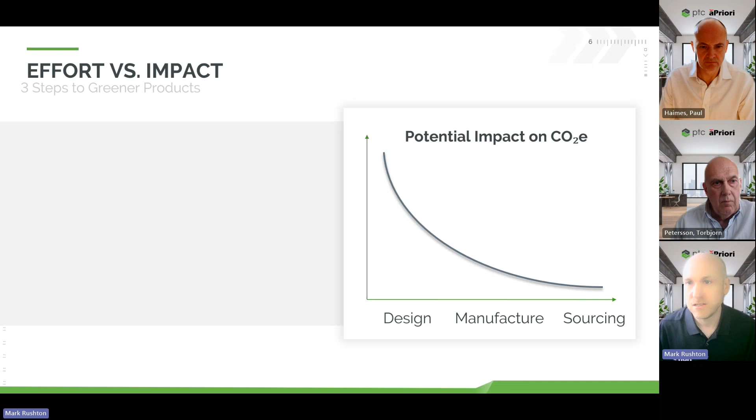So looking at the different levels of maturity, there's a level of effort required and an associated impact, and there's three levels beyond the baselining. So as I mentioned, changing the location can reduce the carbon emissions, but you're not having to make any design changes and no material changes. Then changing the manufacturing process, you might be able to get away with that depending on the design, depending on how much has been invested in tooling, things like that. You might be able to change the material or make some minimal design changes. And then starting from design means you do have a holistic approach where you can change everything.

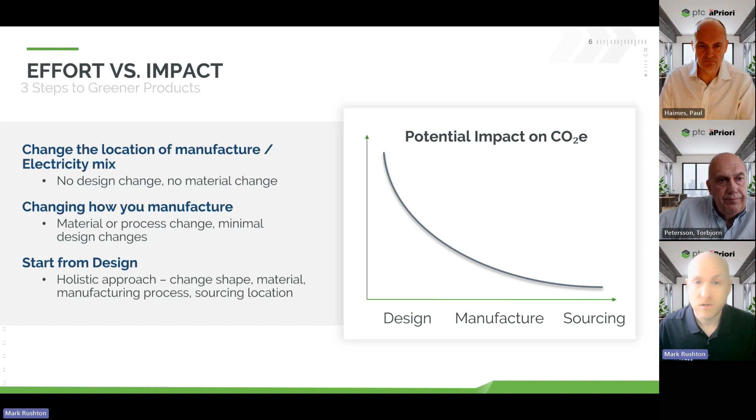And you can see on the chart there, the earlier that you start, the more potential you have to reduce the carbon emissions. And it's very analogous to cost. So you've probably seen this before. And aPriori knows cost very well. We've been doing it a very long time. And CO2 is very analogous to this.

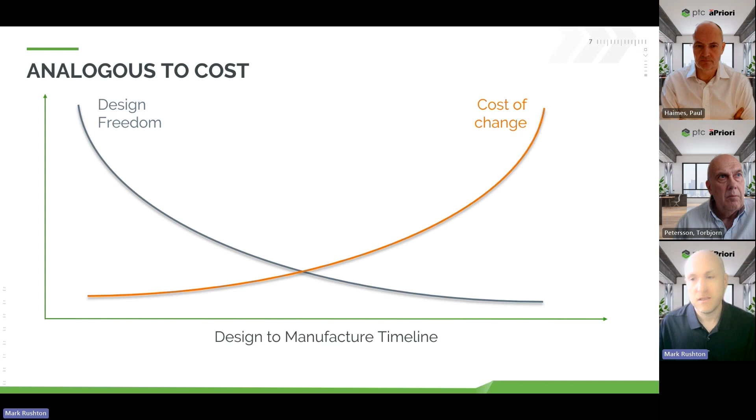So at the start of a project, you've got lots of design freedom. Nothing's really set in stone. So you can make design changes in Creo really, really quickly, and there's no real cost to it. It's just the time. And as you get closer to product launch, more things are locked in. They're set in stone. We don't want to change them, and there's a knock-on effect. So the cost of any design changes goes up the later it is, and that is exactly the same for CO2 reduction potential as well.

So when we start with design for sustainability, there's a number of different ways you can assess it. So a life cycle assessment, an LCA tool, you're probably using them, or at least someone in your company is probably using them today. They really assess everything from cradle to grave. So extraction of the raw materials, the logistics to the manufacturing facility, and any refinement that goes on in between. Then transportation to where it's used, to the customers, to where it's purchased from, things like that.

And then how is it disposed of? What happens at the end of life? Is it recycled? Is it reused? Do we take some and remanufacture it? Or does it go to landfill, or is it incinerated? And if you look at a circular design strategy, that's not really looking at reducing carbon emissions. That's more looking at capturing the resources that are used, reusing the material. And so you can lead to this cradle to cradle and have a perfect cycle.

But in reality, it's never really perfect, because there's always some leakage in that circularity, since you're relying on the users, the consumers, to return the products so you can fully utilize them. So there's always some leakage. Really, cradle to gate is where design and manufacturers can have the most influence, because they're not reliant on the user doing anything in particular. So that's a really good place to focus, and that's where we help as well. But it's really not very straightforward.

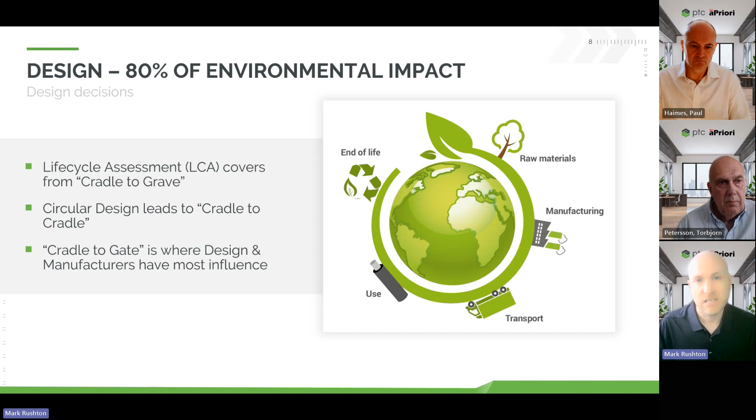It's not intuitive. The next question is really, which of these processes do you think would lead to lower product carbon emissions from the manufacturing phase? We're not looking at the weight or energy use while it's out being used by the consumer, but if we look at raw material extraction through to manufacturing, cradle to gate, what would you say leads to the lowest product carbon emissions? One of the poll questions refers to this slide, so take a look at that question.

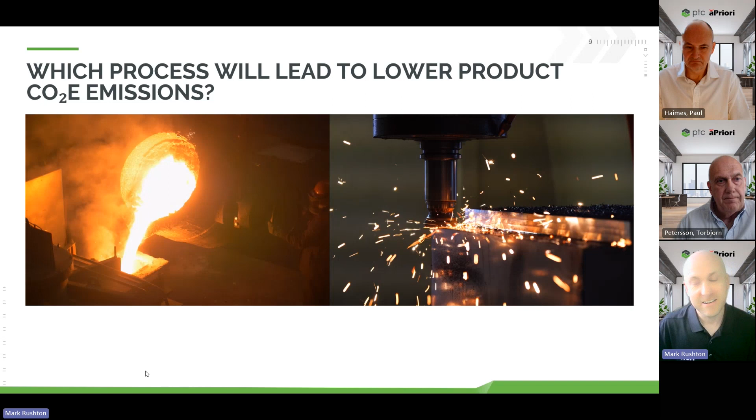I think we had 67% answering casting. Oh, okay, excellent. So I said it wasn't that intuitive, but obviously you do know the answer, because in actuality it does lead to lower embodied carbon for the same design if we were looking at both. That's really because we're looking at the amount of material emissions. The raw material extraction and the refinement of those materials is what makes the difference, and also the wastage, because we're having to buy a certain amount of material to manufacture the product. We really need to consider that amount of material, and machining has got a lot more waste in the process.

Now usually the next question that comes up is, well, what if we reuse those chips or recycle them? Well, we can't actually benefit from that recycling in this product, so we have to consider them as waste. But if we were to use recycled content, that's now got lower carbon equivalent emissions, because it's already been used effectively. We've already accounted for the carbon emissions as waste, so the recycled content is a lot lower.

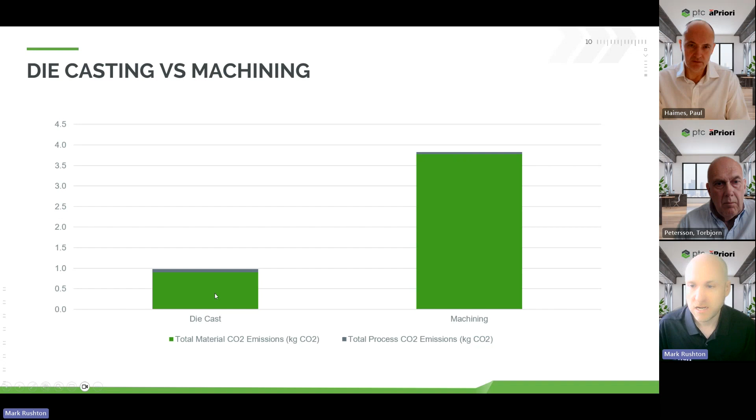Just to break this down a bit further, these are results we found from aPriori. You can see the process emissions are actually slightly higher with die casting, because it's a lot more energy intensive melting the material. There's much lower process emissions from machining, but it's the machining material emissions that really make the difference. And aPriori gives you a percentage of material utilization as well.

So you can see the finished mass, which is usually what gets used in the life cycle assessment, because that's all that's available - that's just taking the CAD model and getting the mass from it. But that's not the true amount of material you need to manufacture it. With aPriori's calculation, we can actually determine the rough mass from the CAD model, and then you get to a more accurate material utilization value and embodied carbon. So that's for casting and machining.

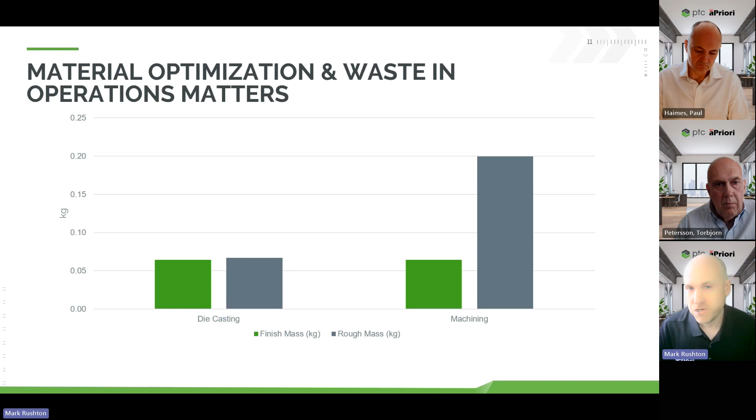But what about a plastic part, a polymer part, for example? Same kind of thing - if you take the same design and look at different materials, this is another approach you might want to use. aPriori comes preloaded with ecoinvent data, so if you haven't got primary data from suppliers about how much carbon is in your materials, ecoinvent is a really good source to augment that.

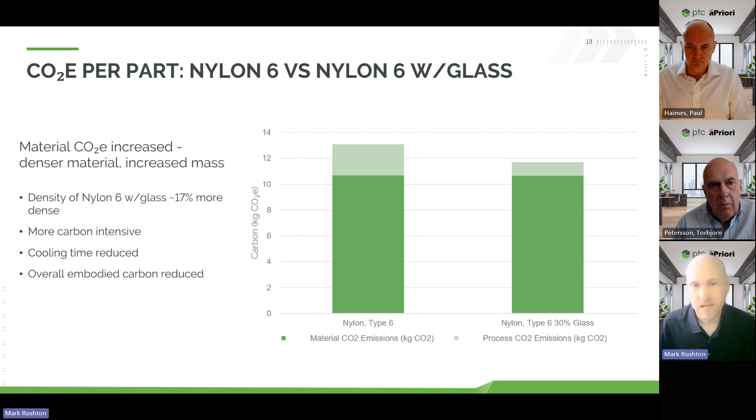That's where aPriori really comes into play, because we look at all of that in a lot of detail. We're actually simulating how long it takes to injection mold the parts or manufacture the parts and machining, for example, and give a really good, really precise comparison between the two, whereas an LCA tool is not going to give you that level of granularity and detail.

One thing that LCAs just overlook is cycle time, because you've got overheads in the factory that are all using energy as well. Being able to look at the cycle time is a big driver of the process emissions. So here we managed to reduce 60% of the cycle time, which led to about a 10% drop in carbon emissions just by changing that material. But we would never intuitively do that because it's a more carbon intensive and more expensive material.

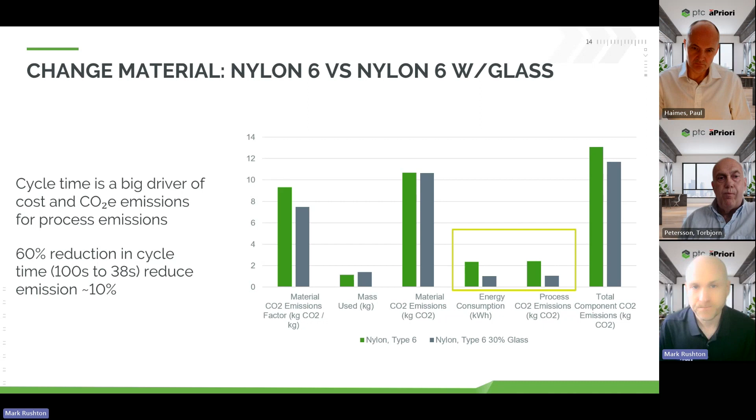And then if you look at that further, if we go to a nylon with 30% glass, it's a stiffer material, so we could actually look at reducing the wall thickness. That's going to lead to further cycle time reduction and material reduction, so that 17% density increase could be mitigated. Just depends on doing an FEA analysis just to check.

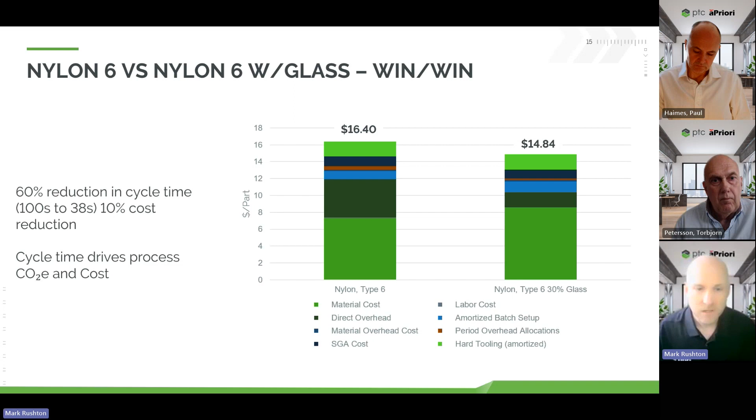So that's how we can break it down in aPriori. We can look at the labour costs, material cost, and all of the process costs that are associated with it. So it's nice to find these little win-win examples, and then obviously we can simulate it again with a thinner wall section and thinner sidewalls and things like that to reduce further.

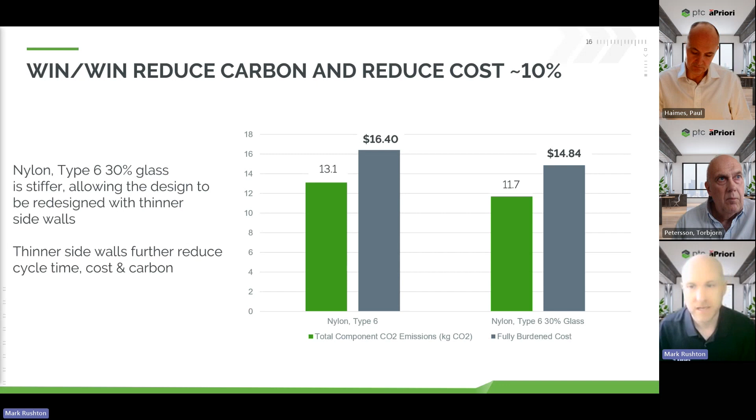I mentioned LCA a few times, and the question in the poll about how long does it take to get results was really aimed at this, because LCAs are very good at creating reports, so you can produce something along with your product and say what the environmental impact is, and they do cover from cradle to grave, which is great, but they do take a long time. They're very manual and they make a lot of assumptions, so they're not great at really giving us the insights to make design decisions, and because they take too long as well, you normally need to have it all finished before you can start to do an LCA.

So if we look at the difference between aPriori to calculate carbon emissions and LCA, there's two very distinct sections within a product's life cycle. The first four boxes you can see on there, that's really where the designer is having a lot of influence, or the manufacturer is having a lot of influence.

Where is it located? Where is it going to be manufactured? What's the shape? How thick are the walls? What's the process and what's the material? So that's cradle to gate.

And that's where we can give instant results, instant feedback, so you can make the right data-driven design decisions around not only sustainability but profitability as well, because we give you a cost figure.

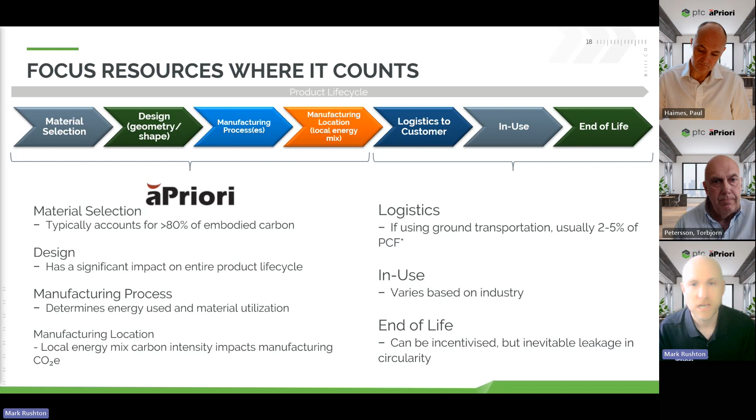And so yeah, opportunities that we can bring with aPriori. We closely work with PTC, so we plug into Creo, plug into Windchill, so you've got that continuous digital thread between all of those products. And we've got analytics as well, so everything you run through aPriori, the results can go into Windchill, but we can also view them in our analytics.

So it helps identify where you've got opportunities to move certain products to low cost and low carbon suppliers based on their location. You can look at different design specifications and different materials as soon as you're designing it, while you're still in Creo or Onshape. And you can also look at changing the manufacturing process - do you use anodizing or powder coating? What's the correct order, the most efficient order, of the different manufacturing processes?

If you've got casting, then machining, and other processes after that, aPriori will optimize that process for you. But more than that, just like we do with cost, we break down every single process and the material, everything that goes into manufacturing the component. We'll break that down for carbon emissions and for cost. So if you've got a particular process that's really high in cost or really high in carbon, you can look to mitigate that process in a number of different ways.

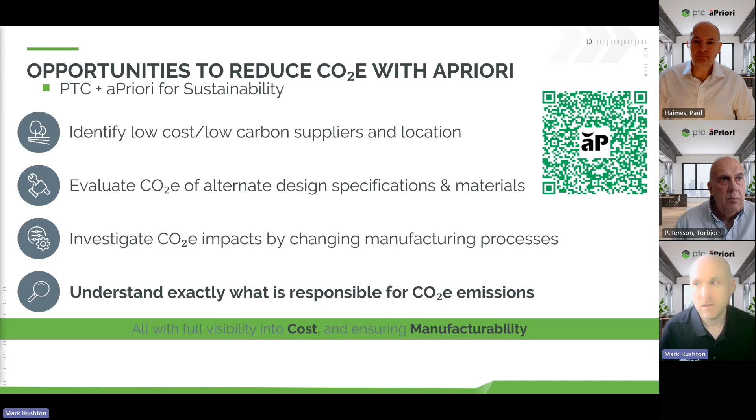Thanks a lot, Mark, for sharing all these interesting insights here. And the first question goes to you, Paul. Now that we have heard great things about aPriori and their offerings and how they actually impact sustainability, can you please comment on how the digital thread provides scope for impact across the broader product lifecycle?

Yeah, thanks Torbjørn, great question. So I think certainly the digital thread supports that overall cradle-to-grave approach that Mark mentioned in his presentation earlier. I think fully implemented, that digital thread and the capabilities that we have - and Mark, perhaps if you just go to the next slide, there should be one embedded in here which talks a little bit about how additional capabilities around the digital thread can have an influence across all of the phases of the product's life.